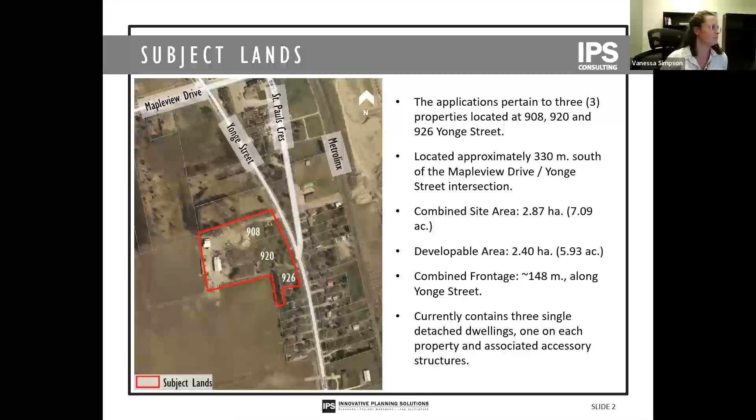The lands are located within an area that is currently seeing a lot of development as well as some redevelopment. Yonge Street is identified as an intensification corridor, and the subject lands shown here are shown in red. This map illustrates an overview of the surrounding neighborhood, which I'm sure you're all very familiar with. They do include a variety of existing residential uses, including low-density single detached dwellings. There are some townhouse dwellings in the area, as well as some more dense developments, including up to 6-story condominium buildings, which have been recently constructed. In addition, a number of surrounding properties have been approved for low to mid-rise residential developments and mixed-use developments proposing both commercial and residential uses with condo buildings up to 12 stories in height.

Other existing uses in the area include some institutional uses like a church, a variety of commercial and retail uses, obviously the GO station here, as well as some parkland trails and environmentally protected lands.

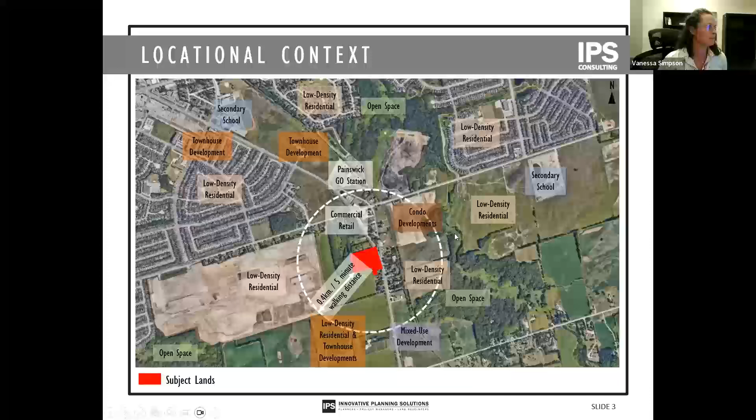As per the official plan, the lands are located within a major transit station area of Yonge Street and Mapleview Drive. You can see that in this first image. In addition, they are designated medium density, which permits developments between 6 to 12 stories in height, with a density target of 125 to 300 units per hectare. The official plan does permit lower building heights if the minimum density target can be met. The official plan permits and encourages a full range of housing options, with emphasis placed on more attainable options, and supports more compact urban forms of development through intensification. The proposed development aligns with the policies and objectives of the official plan.

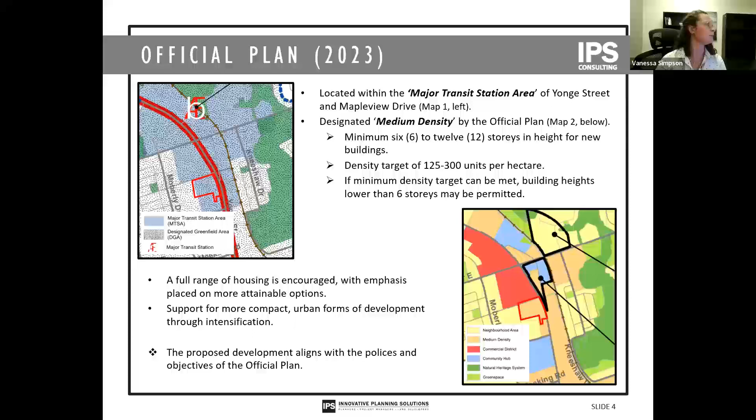The lands are currently zoned private services within the town of Innisfil's zoning bylaw. A zoning bylaw amendment is required to bring these lands into conformity with the city of Barrie's zoning bylaw. As well, the amendment would rezone the lands to the neighborhood mixed use zone with site-specific special provisions as required for the site plan proposed. The neighborhood mixed-use zone, or NMU zone, permits a wide range of residential uses, including apartment buildings, condominium buildings, and back-to-back townhouses.

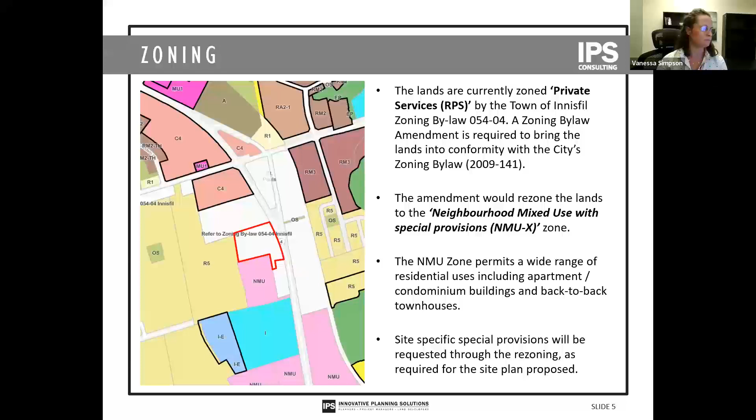The proposed development is shown here. As you can see, we've changed orientation a little bit, so Yonge Street is here at the bottom of the slide. Street A, which would be along the north property line, is a new road proposed within the subject lands, which will provide access to both the proposed development as well as continue through to the future development to the west. Additional vehicular access is proposed from Street BB, which is within the development to the west as well, the future development to the west.

Two 12-story residential condominium buildings, with a shared 7-story lobby, are proposed fronting Yonge Street. Direct access from Yonge Street to the lobby will be provided.

Additional access would be provided within the internal workings of the site. There are 8 3-story back-to-back townhouse blocks proposed, shown in both yellow and purple. The yellow ones have private driveways and garages, whereas the 2 blocks shown in purple would have a shared parking garage structure. A total of 486 residential units are proposed, providing a density of 203 units per hectare.

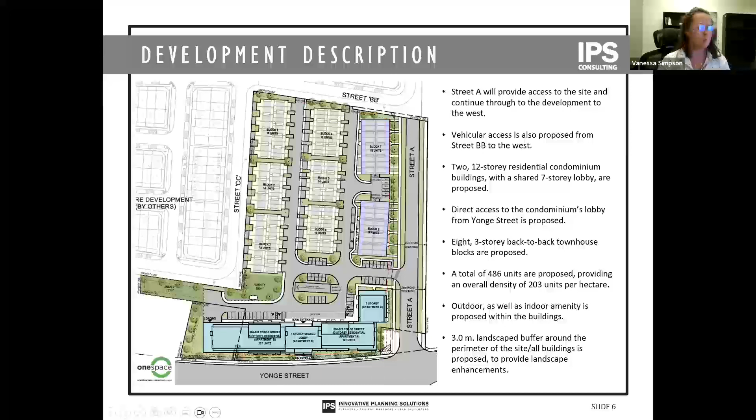Common amenity area is also proposed, with some shown outdoor as well as common indoor amenity area within the condo buildings. A landscape buffer providing a minimum of 3 meters would surround the perimeter of the property and all buildings, which will provide the opportunity for landscape enhancement between the development, built form, and the street.

Now I'm going to take a closer look at the 12-story buildings proposed. There are 2 towers - Tower Building A, the more northern tower, and Building B. Within Building A, which also includes the piece that wraps to make an L shape, 147 units are proposed, and within Building B, 207 units are proposed.

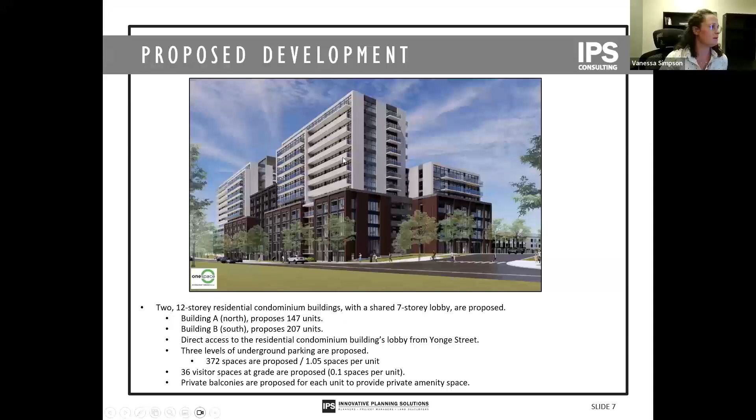Direct access to the residential condominium buildings lobby from Yonge Street would be proposed. There are 3 levels of underground parking provided, which will provide approximately 372 parking spaces for the residential units. Additional visitor parking will be provided at grade. Each unit has private balconies, as you can see in the illustration.

Taking a closer look at the back-to-back units proposed, 6 3-story back-to-back townhouse blocks are proposed with private driveway and private garage - these yellow blocks are those ones, and in total there's 96 units. The 2 purple blocks would have a common underground parking garage, and in total there's 36 units proposed. This is an illustration of what they'd potentially look like. They're still being developed, obviously.

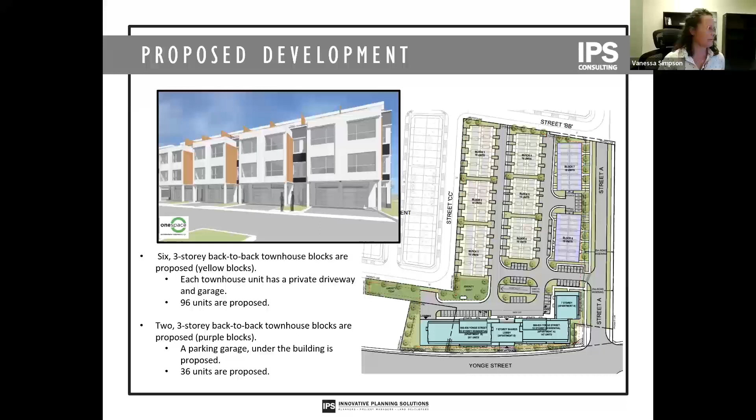So through the submission, as we move forward and continue to work on the applications, a wide list of studies and reports are required. This is the extensive list that will be provided once we make a formal submission. I will note that these documents will be available on the city's website. You can reach out to Logan to get direction on where those would be when the time comes. If you'd love to read any of those, they'll be there for you.

And just a brief policy review. I'm not going to get too far into it, but the proposed development and associated applications will be further justified through the planning justification report with our formal submission package.

Direct growth to the settlement area, which is Barrie, is projected, where population and residential growth is projected to be accommodated through ambitious levels of development. To support complete communities and sustainable communities, a shift is directed to create more of an urban city with higher densities, more compact built form, vibrant public realm, and a mix of land uses.

Within the major transit station area, intensification is supported. Developments are to provide a variety of housing options, including affordable housing options. The collective goal is to create new housing options and a more diverse range for the residents of Barrie.

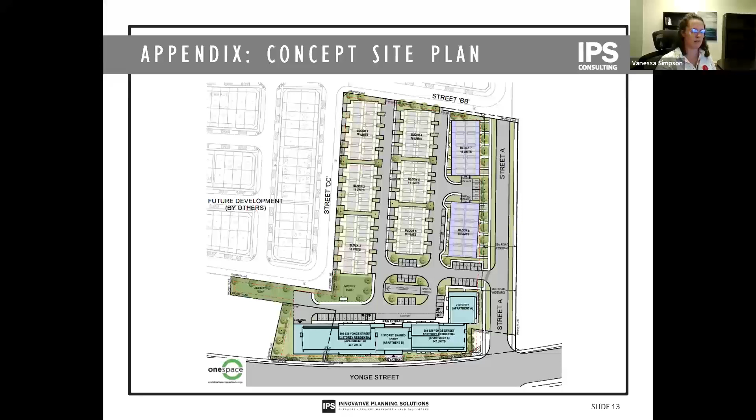The development would support the city's direction for growth at the Yonge Street and Mapleview Drive major transit station area. Collectively, the development aligns with all levels of policy, seeking evolution into more complete communities. Thank you for your time, and I'm happy to answer any questions or provide clarification on today's presentation.